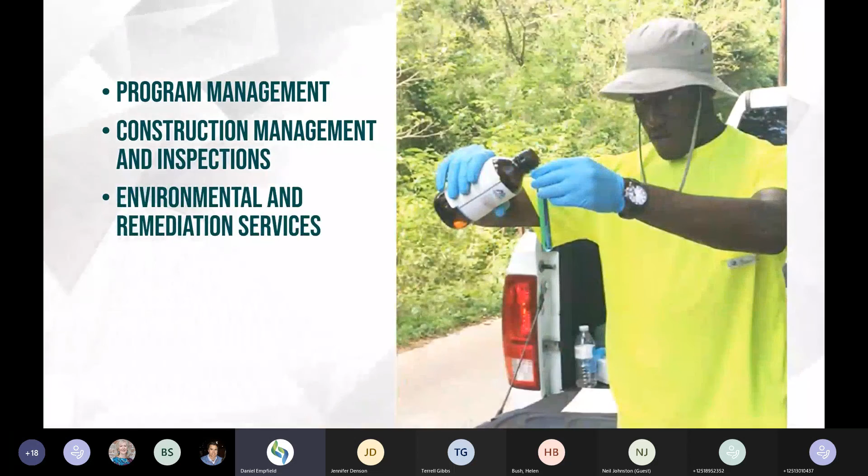Over the past 25 years, our small minority-owned DBE firm has grown to more than 100 technicians and professionals. Our civil engineers, environmental scientists, surveyors, and project managers support projects of varying scope and scale for our clients. Our team has broad-based experience covering several key practice areas, including program management, construction management and inspections, environmental and remediation services, civil design, survey, and geotechnical engineering.

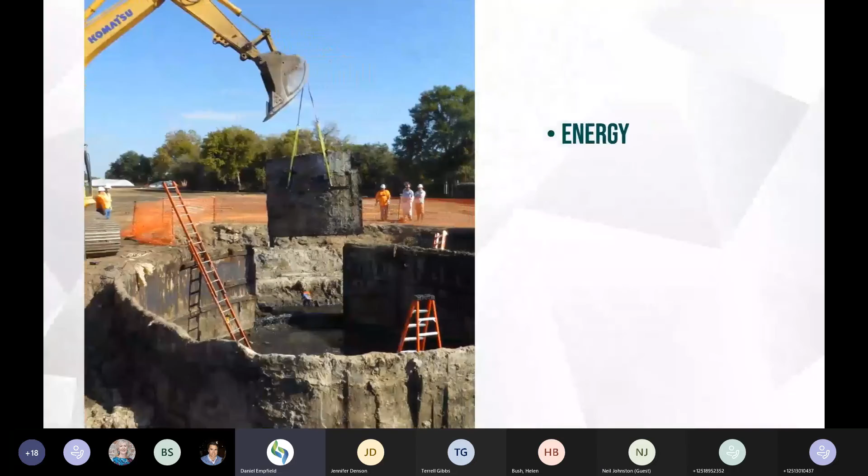We provide these professional and technical services to our energy, environmental, federal, facilities, and water resources clients across the southeastern United States. When it comes to environmental services, CERM brings considerable know-how and commitment to environmental challenges unique to these types of projects. We routinely work with school systems, national, regional, and local governments, and corporate stakeholders to provide a range of environmental services. These services include sustainability, compliance, assessment, and remediation.

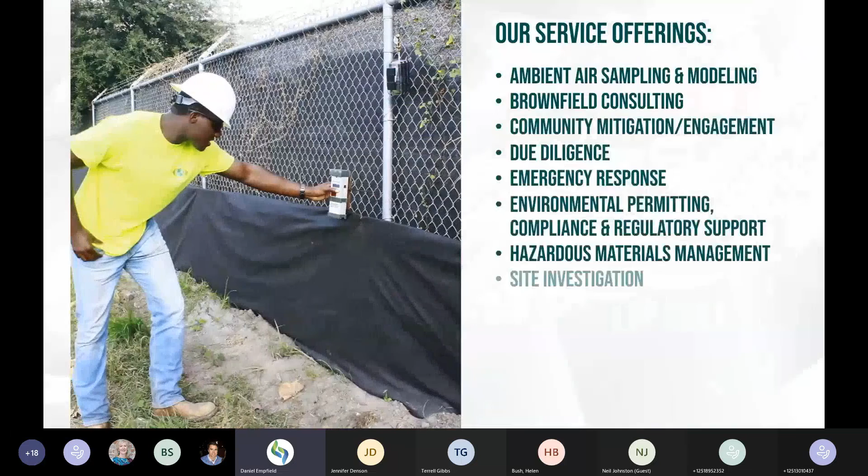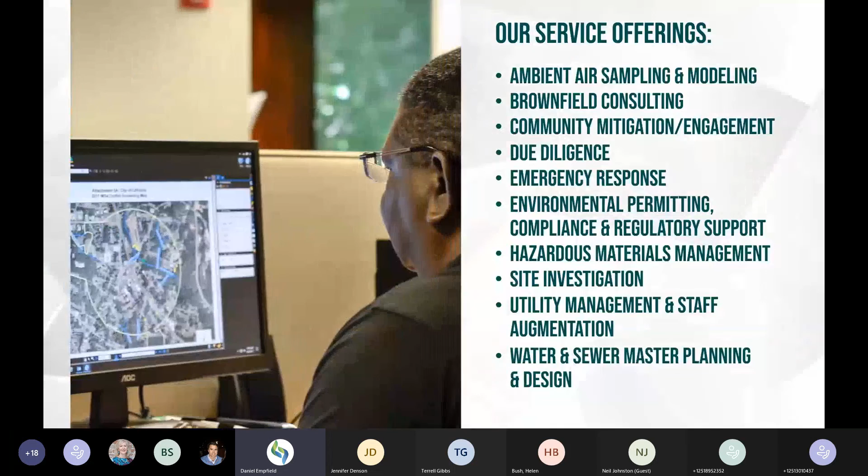Further, we understand the unique responsibilities and risks associated with environmental restoration and remediation projects. When it comes to navigating the complexity of an environmental project, CERM's demonstrated regulatory expertise ranges from single-site evaluations to federal impact studies, allowing CERM to handle any size project.

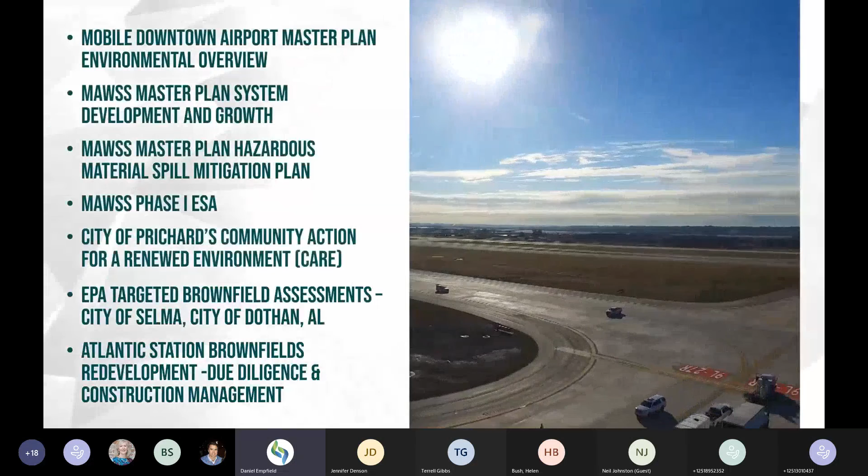Whether it is an EPA project, brownfields assessment, or regulatory support, CERM has the team and the capabilities to support you through the whole process.

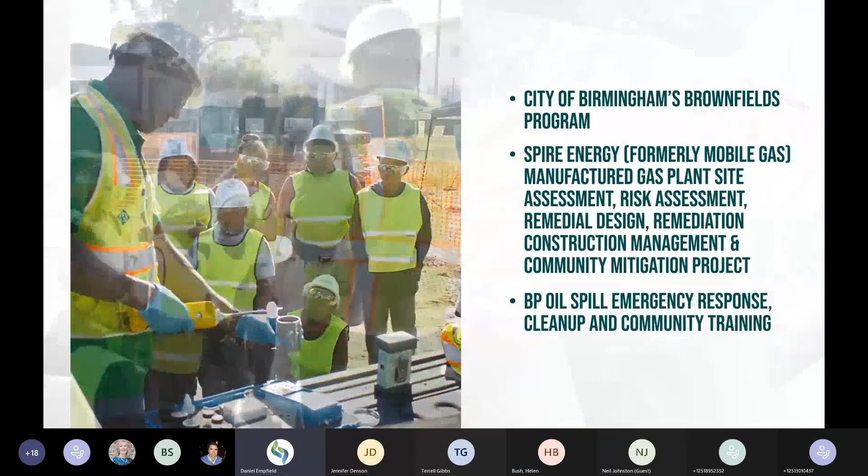Today, more than ever before, environmental impacts are linked to economic development, regulatory partnering, community planning, and public policy. With the depth and breadth of our expertise and our hands-on experience with large and small environmental projects, CERM is a proven leader in environmental management.

CERM is more than just an assessment firm. We have a deep technical bench strength that provides special services beyond just providing environmental assessments. Our team has the ability to manage projects from the planning phase through closeout. Corporate Environmental Risk Management is your single source for environmental service needs.

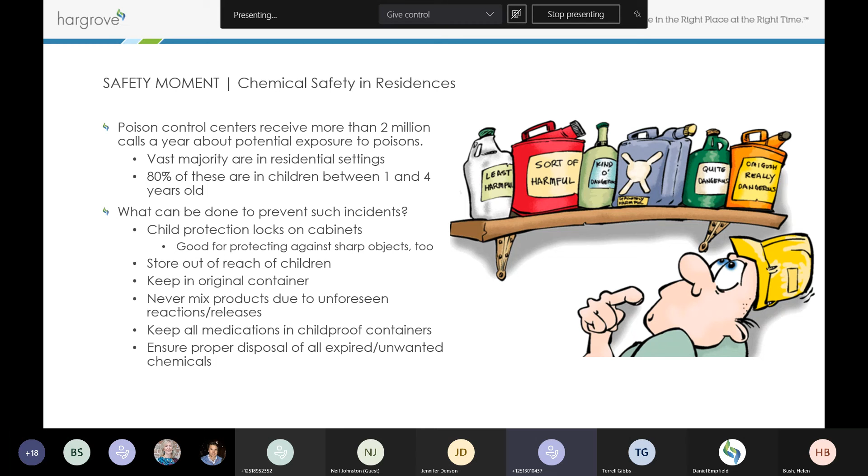So the first couple of things we're going to talk about are some past environmental disasters and issues that have taken place, and really jump into some root causes and try to bring a commonality to some of this.

First is the Boston Molasses spill. One of our teammates, Alan, told us he'd actually been there, and this incident kind of started a lot of the ASME codes. During World War I, the construction process was rushed for this tank in Boston. Just a few years later, the neighborhoods and residences around it got accustomed to hearing this large tank groan and leak, and they actually used to send kids out there with pails to get molasses from the leaks in the tank, believe it or not. One thing we know about cracks is if they're not mitigated, they can continue to spread until it's catastrophic, and essentially that's what happened.

It failed and sent molasses waves 15 feet high through the area at 35 miles an hour - that's one of the things I can't wrap my head around. Unfortunately, over 20 people were killed in this incident, with 150 injuries.

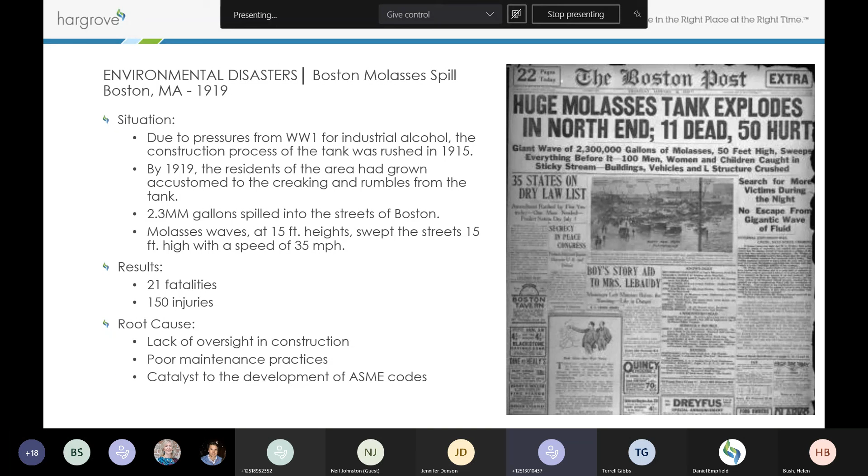This was due to rushed construction and poor maintenance practices - they weren't monitoring. There were no practices back then that would lead to checking on the tank and looking for cracks and mitigating that. It was a different time, and we didn't have the knowledge then that we do now. This incident really helped generate the conversation and was a catalyst for a lot of the codes we see in ASME currently.

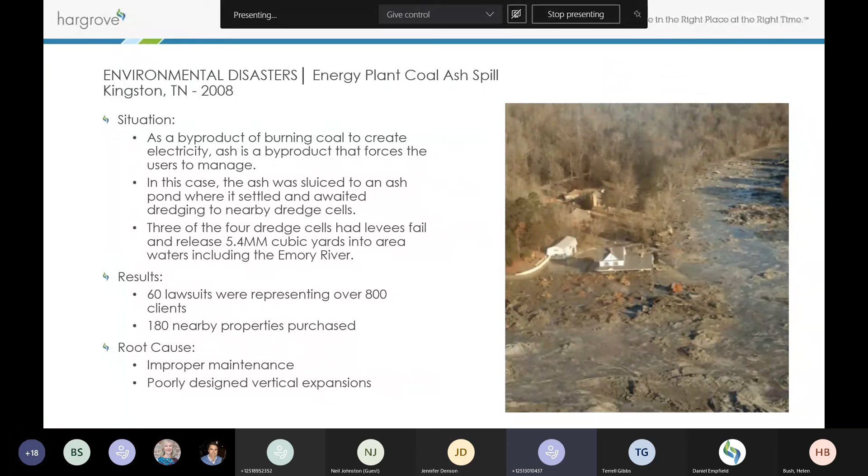Next, in 2008, there was an ash pond levee failure in Tennessee. Unfortunately, pond levees and dams are something that often go unnoticed or not given the attention they deserve, because we build it, it's there, and if we see it leak we'll try to do something about it - when in actuality there's a lot more we can do to monitor levees and dams.

In this situation it was a coal power plant, and the byproduct of burning coal is ash, which was sluiced to an ash pond - a typical process for getting rid of ash, where it's settled out, then dredged and stored. Unfortunately, 3 of the 4 dredge cells failed, and about 5.4 million cubic yards got into the native waterways around there. You can see from the photo that there were residences and a large impact downstream, unfortunately.

Again, it was a result of not truly understanding the assets. In the manufacturing world, we think of assets as pumps, tanks, and reactors - but levees and pond dams are every bit as much an asset that we have to track and maintain. Here, 60 different lawsuits were filed, and the facility had to buy nearly 180 properties around it. The company is still going through a lot of headache, and this was 12 years ago - these things really linger, and it's hard to get out from behind these types of incidents when they happen.

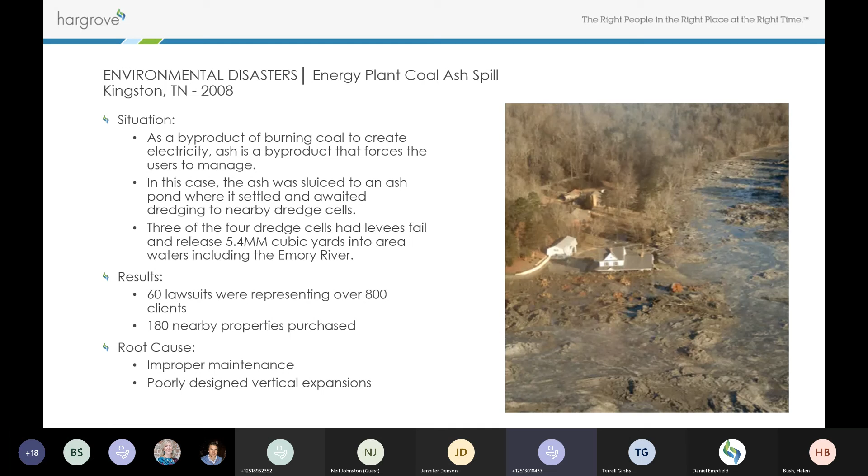Let's go to the next one. The last one we want to talk about here - unfortunately you could spend all day talking about past environmental disasters, and we're not going to get into that, but this is the last one I really want to cover. This was in Russia, this year. It was a diesel fuel tank rupture.

It's similar to the molasses incident, and you'd think we learned from our past sins. Well, similar situation - it was near a residence, and some of the residents had noticed that it had begun to leak. It was just kind of expected, and lo and behold, it turned into a catastrophic failure. Unfortunately, 31,000 cubic meters had to be removed, and they're still working on it.

It's $145 million in cleanup efforts to date, and again, when we think about the financial burden of this, that's really the least of the concern when you think about what's happening, what's transpiring to nature, to wildlife, and then you have the public perception. There's a huge distrust there when these types of things happen.

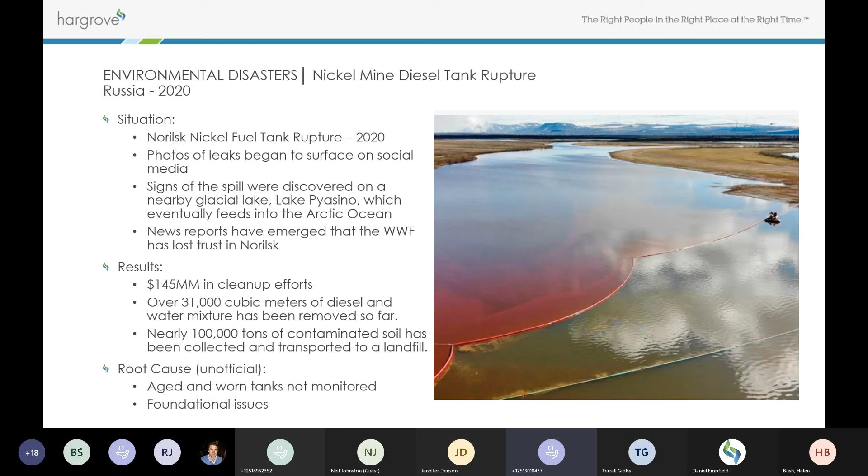So we wanted to talk to you a little bit about these past failures to show the common theme of when we're not adequately monitoring assets, when we're not looking at levees, tanks, piping. There are so many things we have codes and technologies available to us for, and it's so important that we truly dip into and take advantage of what's available to us now, some of the codes and technology.

And so when we think about reliability excellence, when we think about asset management, this is somewhat of an industrial standard reliability pyramid - I've done my tweaks based on my experience with it. But when we think about why it's so important to have proper asset management, what we want is predictability and consistency. That's the bottom line. We want predictability and consistency, because that leads to improved environmental health and safety.

As we've seen here, when we know our assets are in good shape, we don't have to worry about this type of thing happening. And we're also much more effective, more productive, our OEE goes up. We're all more successful overall in the end.

One of the things I can't stress enough, and I'm going to read this because I truly believe it - even the smallest and most basic assets must have a reliability plan. Because whether it's a small piece of pipe or a small tank, it doesn't take much to result in a catastrophic failure, because you never know what's upstream, downstream, and how the dominoes are going to fall for a piece of equipment.

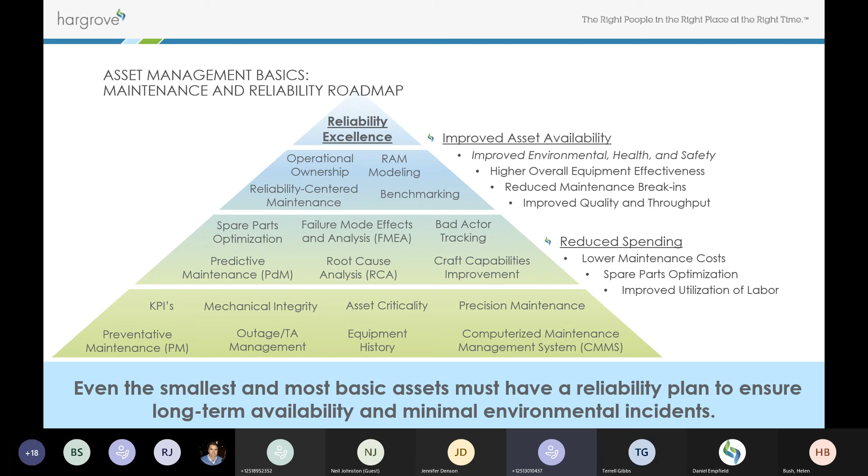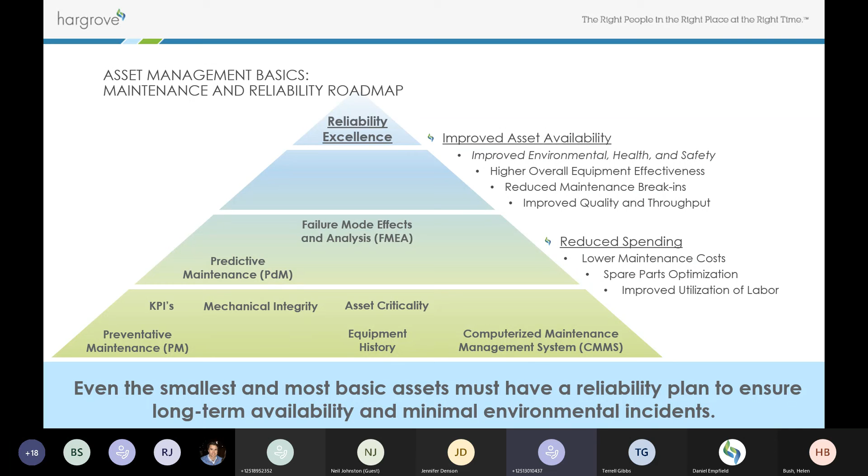So when we think about the environmental side of this, that whole pyramid - it's an asset management roadmap in manufacturing - but when we think about just the basics and how this applies to environmental applications, you have to keep equipment history, understand the criticality, mechanical integrity for pipes and tanks, just like we covered. We have to look at our key performance indicators, KPIs, and there has to be checks - preventative and predictive maintenance strategies applied to all these assets. This is just a couple of things I wanted to highlight based upon this pyramid and how it applies to what we're talking about today.

We want to keep everything in that precision state, because as it starts to fail, the cost of ownership really grows, and it takes so much to remediate it - so much effort, headache, manpower - and the phone hardly ever quits ringing when you get to that point. So we have to put all the things today toward keeping us in this precision state, so we're predictable and consistent.

A few of the tools at our disposal nowadays in industry, with our reliability effort, we have to make sure we're doing the proper preventive and predictive maintenance. Whether it's a tank, that's looking at wall thickness, crack propagation; with rotating equipment or transformers, you're looking at oil sampling and testing, vibration analysis.

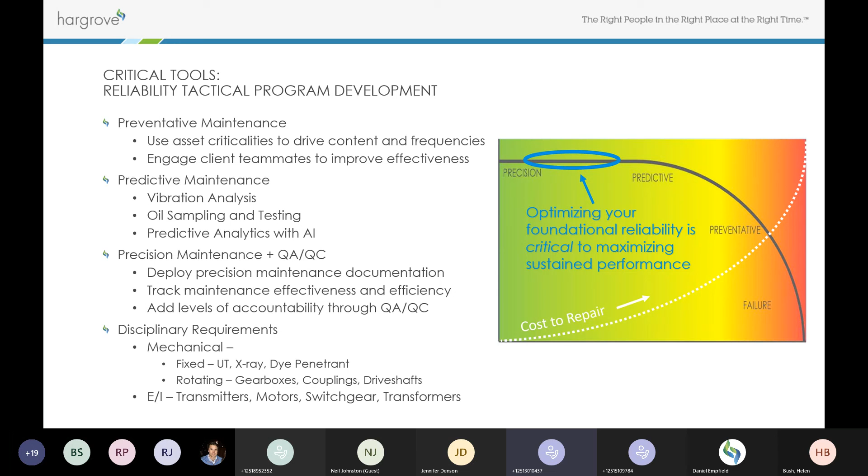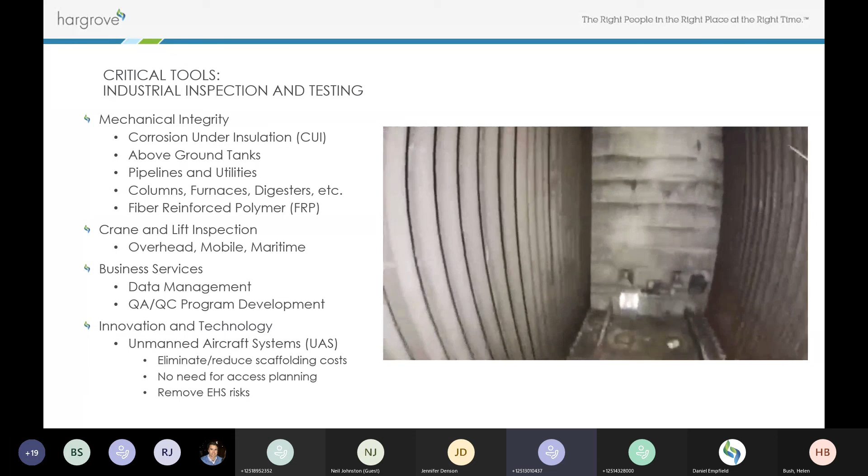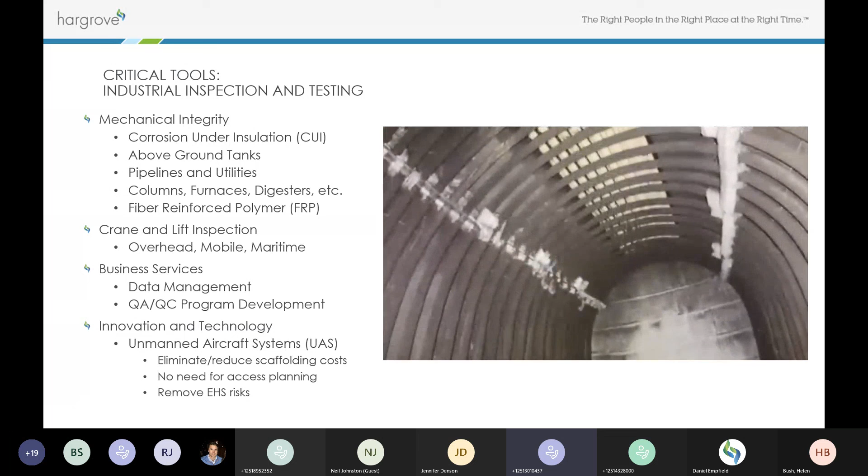Drones - and I don't want to talk too much because that's this guy's expertise right here. When we think about looking at mechanical integrity, there's so many more tools available to us now that we really need to be utilizing, because they save money, they save time, they save lost production.

You think about the inside of this furnace right here that we're looking at - they didn't have to spend a full shift or two scaffolding this furnace. They didn't have to even clear it for confined space. The drone went in there, and you look at this.

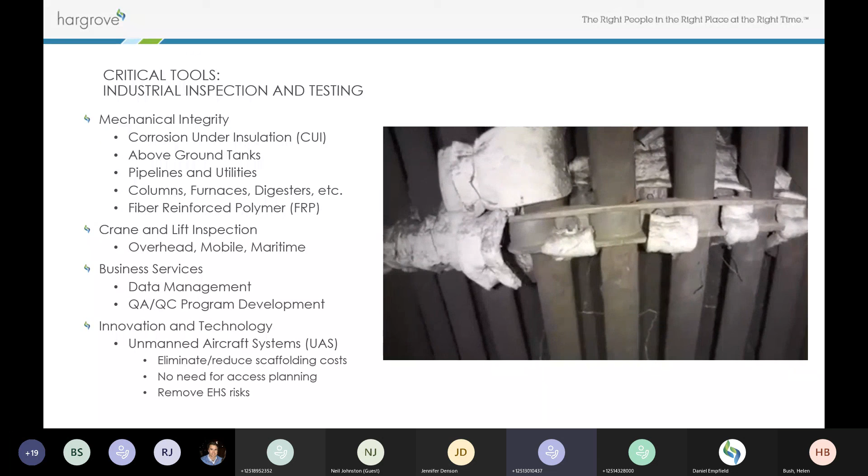But also, not to get too deep into the drone because I know Adam's going to talk to you a little bit more about that, we have to have good record retention and data management on this, because that's absolutely critical for compliance and understanding where our assets are in their state, looking at that P to F curve overall.

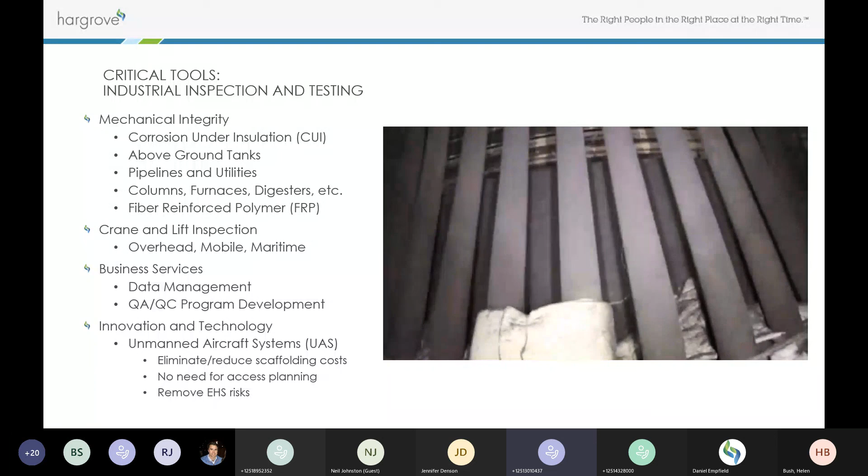Also, pipelines - corrosion under insulation is a big one. You see a lot of pipes in different manufacturing settings that are insulated. Unfortunately, water can get under that insulation, and you don't know the pipe is corroding until you peel it back, or it fails. So it's very important, and there are so many codes available to us, that it's critical we understand and apply them to the different aspects of our role in manufacturing.

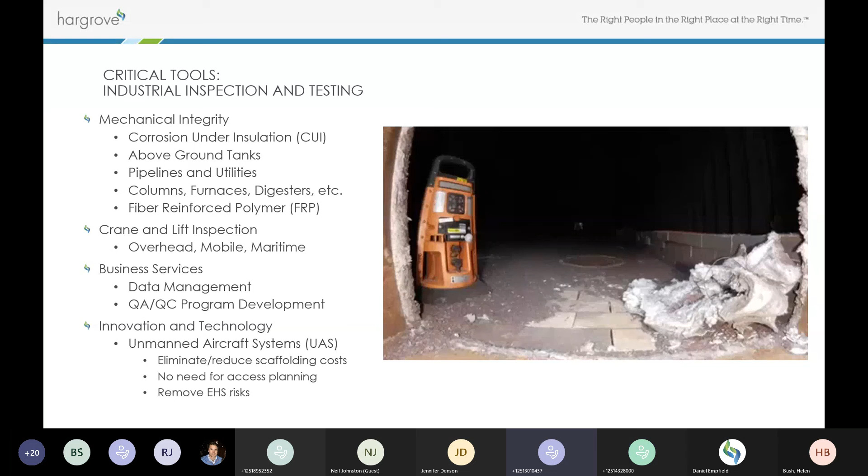So I'm going to segue and let Adam take this, and we're going to talk a little bit more into our tools and technology available to us.

As Matt just mentioned, one of the tools out there with a multitude of uses is drones. As you just saw in the previous video, putting a drone into hazardous environments takes out the human element. So there's a safety factor there - you can send that piece of equipment in, you don't have to send any personnel in, and you don't have to consider confined space or putting people in those hazardous environments. So from a safety standpoint, drones are key, and there are several different uses out there for a drone.

Most of the time you've got cameras mounted on the drones for either video or still imagery. That data capture is done by just taking pictures or turning the video on and recording, which can be live fed - you can see it on the screen as you fly the drone - or stored, so you have a record of it. If you're doing annual inspections you can keep all that data electronically. I mentioned the safety aspect of it - drones can go into areas that are more difficult to reach than others and get a much safer, better vantage point.

Some of the camera payloads out there now have extremely high resolution cameras. You do an inspection, the drone can sit back a little bit, you zoom in, and get very high quality imagery that you wouldn't be able to get if you were taking pictures from the ground, just walking through an area. You can get different vantage points.

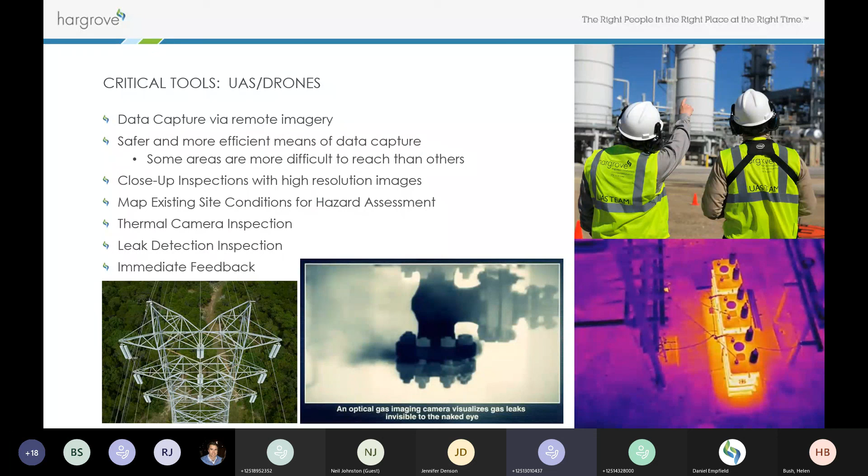And like I mentioned before, it's able to provide immediate feedback. You can see it on the screen as you're flying.

What would happen to that equipment? Would something fail due to flooding that would cause some sort of environmental impact?

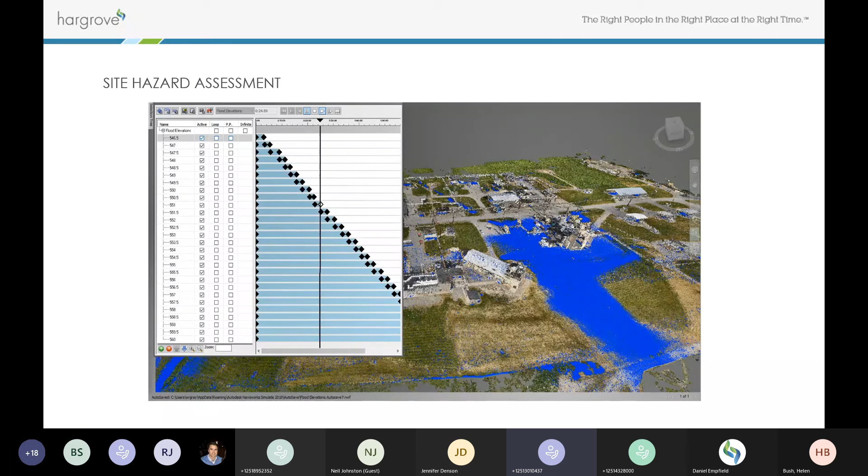Another tool that's out there, not only with a drone, but laser scanning and 3D data capture - collecting information and putting it into a 3D environment, not only to identify where any potential issues exist. For example, for tanks you might have distortion, out-of-roundness. These tools are available that can be used on an area to determine if there are any issues with the integrity of that asset.

The data is digital, which, dealing with COVID and working from home the last several months, being able to capture that information and put it in a digital format that can be shared either across a network or transferred via hard drive, makes it a lot easier for all of us who need to keep doing our jobs, whether that's in the office or from home.

The data can be used just about anywhere. It's highly accurate, and it ensures your equipment effectiveness and reduces the chance of failure.

Not only identifying stuff after the fact, but also aiding during construction to ensure that equipment was properly fabricated to the design, that everything will fit up as installed in the field to make sure it functions properly. If you've got stresses that weren't intended during design - say a pipe was fabricated incorrectly and they try to shove it in and make the bolts line up - that adds stress to that piece of pipe or equipment it's connecting to, which causes wear sooner than anticipated. You may have a failure earlier than expected, or it may require more maintenance due to those issues.

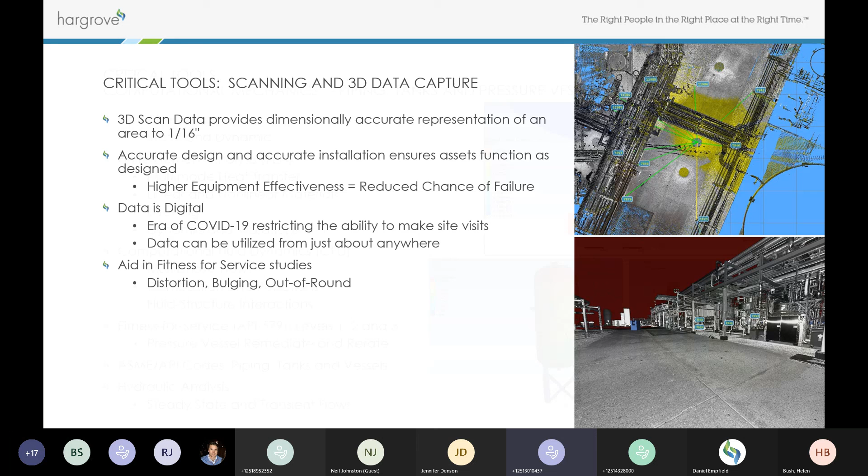What we're able to do is take problems that clients have, whether it's failing miscellaneous assets, or when you have inspections done and see that we caught some thinning somewhere, some wear, some corrosion, and our tank is thinned out. That doesn't mean you have to replace it - it means we need to do a deeper dive, a fitness for service test, because oftentimes we're able to give 5, 10 more years out of a tank just by making a few modifications to it, strengthening it up. Hitting certain checks within our mechanical integrity inspections does not automatically mean replace. I can't stress that enough - we're talking extending, reducing CapEx, and pushing that out where you can focus on your much higher priorities.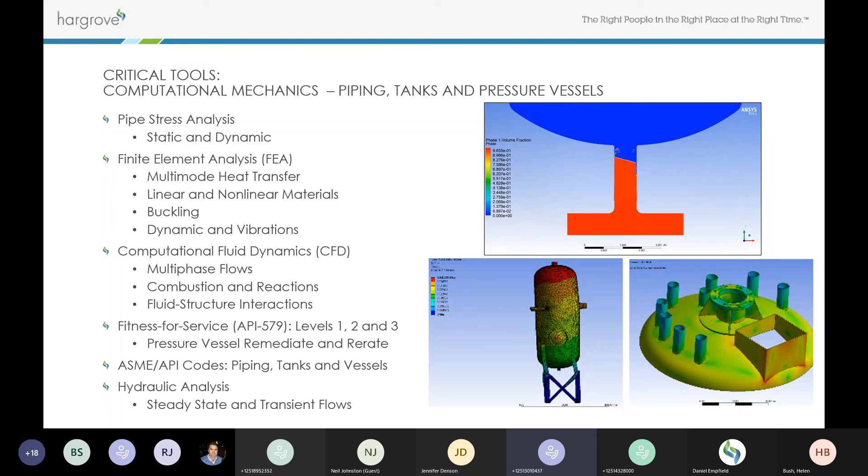The thing is, this type of technology isn't well known, so we struggle sometimes to make sure we leverage it and take advantage of it. We also think about CFD, computational fluid dynamics, just like this little clip you see up here, whether that's water hammer - there are so many things. This was a $750,000 failure at this point, and we did a study, and for pennies on the dollar we were able to just put a different style valve in for them and reduce the failure that had happened 3 times before. So it's these simple things that are available to us that we have to make sure we continue to take advantage of.

When we think about computational mechanics, this goes back to what we're seeing - all these different damage mechanisms we have to keep in front of us, because these small things can get pretty big quickly, just like the tanks mentioned earlier in the presentation. You see these cracks here, these fatigue cracks, these crack-like flaws. Those can grow quickly because of some of the very stressful processes we put these assets through. All these things have to be very carefully monitored and mitigated as applicable.

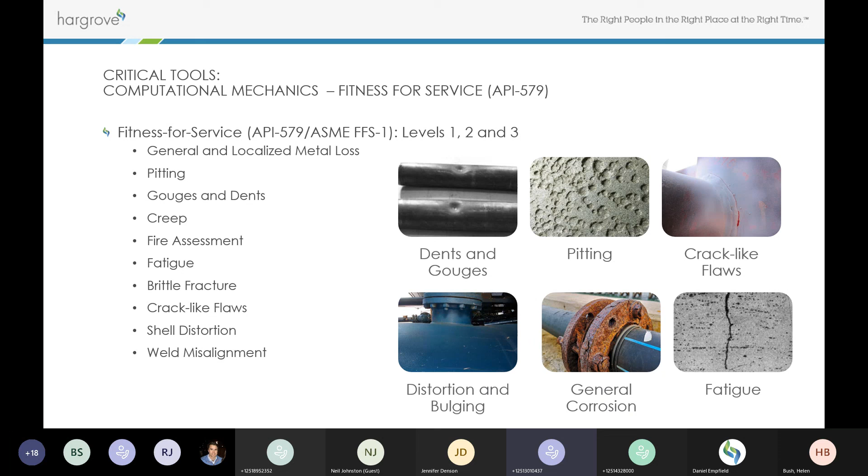This is one of the examples about the tank I was telling you about. Here we were able to make a grid of the vessel. We found our T-min in this specific location, as you can see through the discoloration here. We put some remediation bands into it and gave it 10 more years - instead of spending $3 million on a new tank, for pennies on the dollar we give you 10 more years out of it.

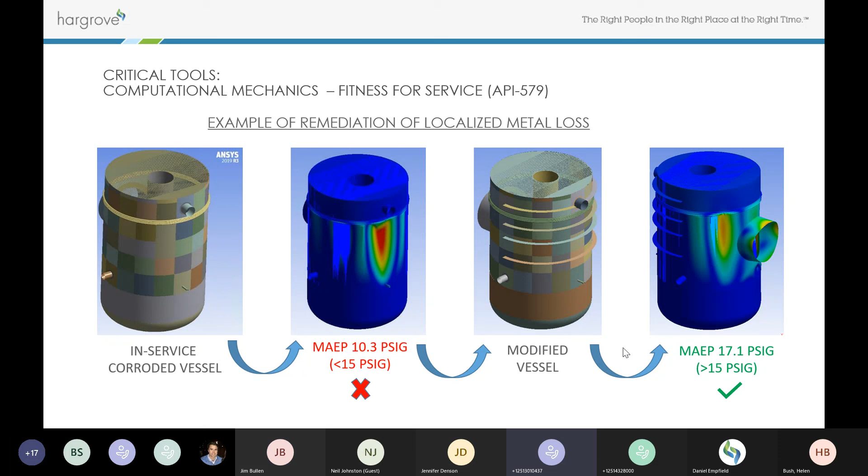Pipe stress analysis is another one. Leaking pipes lead to leaks, vibrating pipes lead to leaks, and that's one of the unfortunate things. Very few things we have running through pipes in industrial manufacturing are okay to hit the ground. So it's so critical, whether it's flanged or welded pipe, that any type of vibration be addressed sooner rather than later, because it will leak. When you think about fracture mechanics, fatigue, vibration - it will leak.

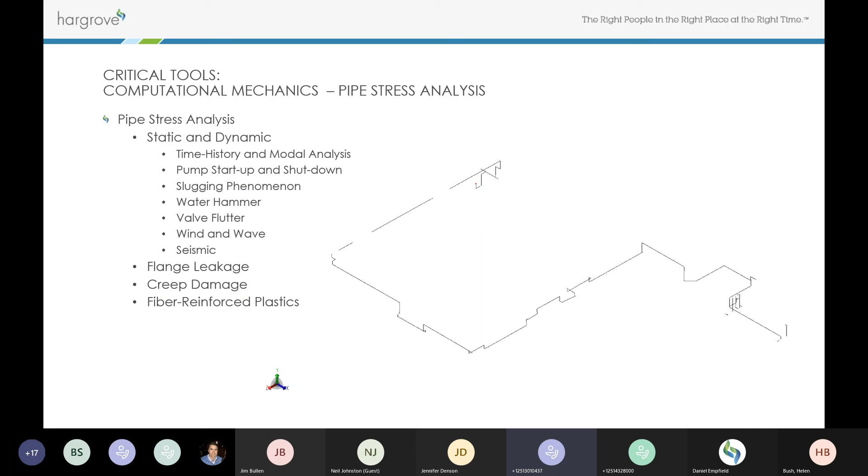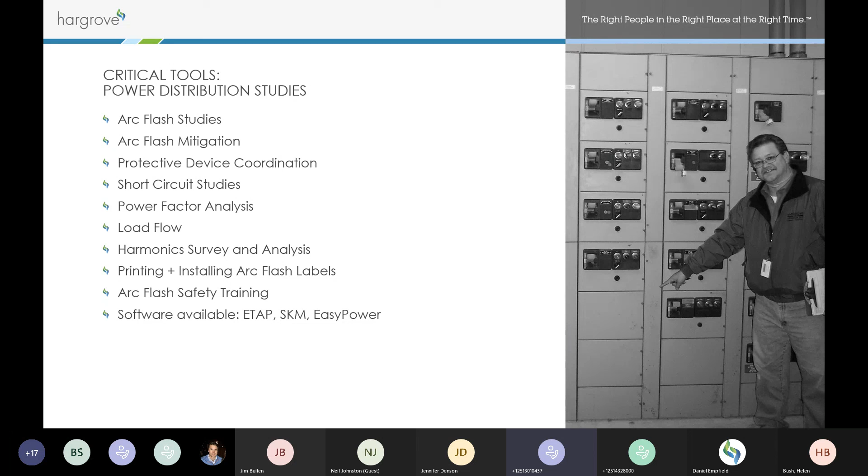EPD, electrical power distribution, is a big part of this. When we think about all the different control systems put in place, all that requires electricity, and of course we design for fail-safe, we design to lose it. But whenever we start to lose electricity, we start to lose our controls, we feel helpless at that point - and we kind of are. So that's why it's so critical that we understand our switch gear, anything inside your MCCs, your cabling, your electrical integrity. Electrical instrumentation integrity is often understated, and it's so critical for our well-being and success in manufacturing.

I touched on this just a little bit earlier, predictive asset monitoring. Through AspenTech, we're able to look at, and this is the only Mtell application, a software that monitors all the data coming in and out of an asset. And nowadays we have so much data.

We think about Internet of Things, everything that's available to us. Well, now we're kind of at data overload. We struggle to understand exactly what's coming in, because not only are we trying to look at all the data in front of us, we're also being pulled into 15 different things trying to fulfill our roles.

So when we think about the future of manufacturing, we think about cutting edge technology, this is what we're seeing as far as asset monitoring goes. This is able to detect failures early on, before you even see bearing patterns or any type of vibration, and this will work with operators and your operations group to make sure you're operating and maintaining as you should be to maximize life throughout the asset.

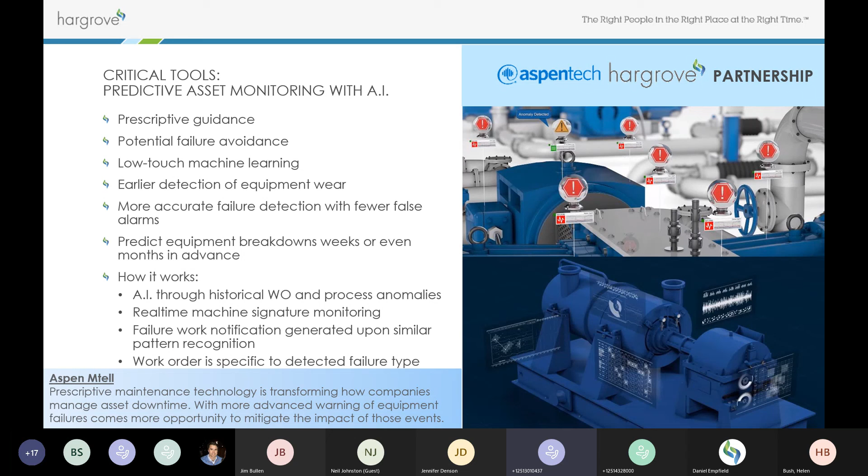This adds layers of time and reliability, predictability. So we're basically taking our drawings and our process design and running it through life cycles. We're understanding exactly when the failures might occur, when we're trying to schedule turnarounds. We were trying to push turnarounds to 6 years, okay, so what's that going to take?

What this does is allow us to quantify and predict our failure patterns so we can design around that. If we're trying to hit a 5-year turnaround, and this pump we're putting in, history tells us it's only a 4.5-year life pump before it starts having seal failures, something like that. So we have to put in some redundancy.

This program really allows us to dig deeper and add those layers of technology, those layers of design, take it into reliability, take it into a life cycle approach, so that we're able to understand those true concepts and design and safely design to where we can mitigate any failures that would result in any environmental catastrophes.

And with that, that's our last slide we wanted to talk to you all about today. I hope this gave you a little bit of an insight to asset monitoring and how critical it is to how we are successful, how we mitigate environmental risk, because it is critical, and the two are often thought of independently when in reality they're not.